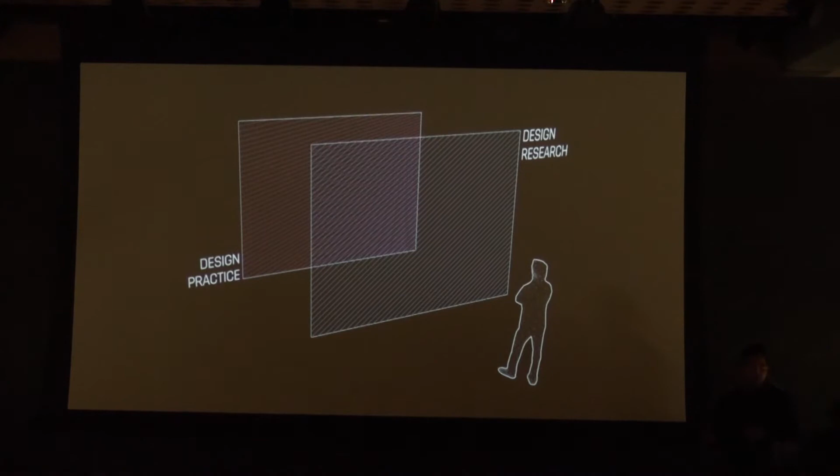This is something I'm interested in a literal sense, but more specifically in a figurative sense. What I'm interested in is the overlay between design research and design practice. Design research is where we begin exploring technology as a technique, and design practice is where we begin exploring technology as a tool. What makes these things multiply and become exponential is the project lens, how you view this relationship and how technology now informs a new design intuition.

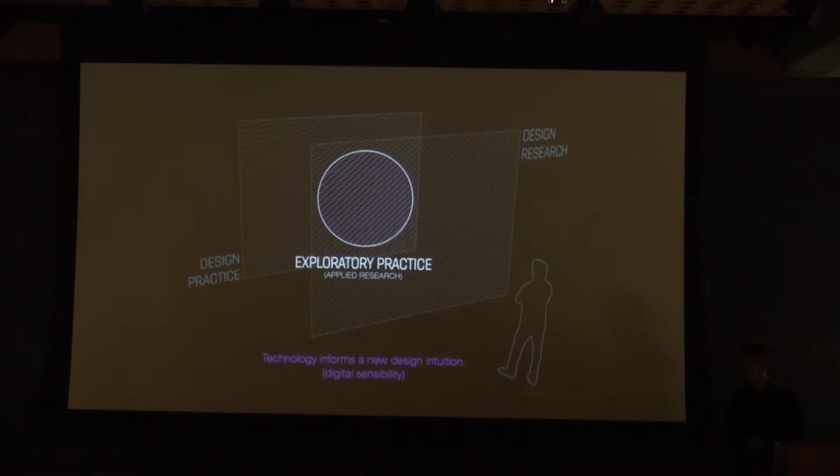What I'm not interested in is thinking of design as a science, nor as a pure humanity. I'm very interested in this sensibility and intuition of thinking of design as an intuitive process, informed by developing a greater agility with these tools, and thinking about the computational tool the same way previous generations have thought of the pen or the physical model, as tools that help you think.

The work we're doing in the office crosses a number of different scales, from very, very large to very, very small. All of these projects range from academic to self-initiated competitions. We've won some, some have been commissioned, some have been realized. All of them are what I would call applied research projects.

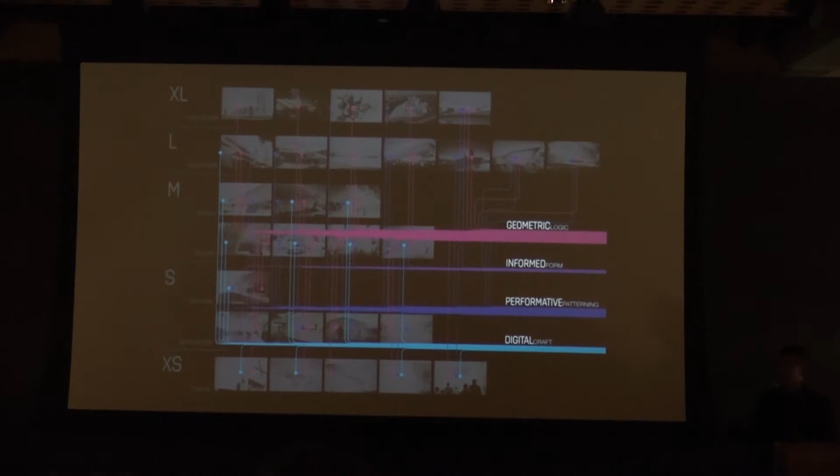Those applied research topics are identified as geometric logic, informed form, performative patterning, and digital craft. I'll get into more detail of each of these topics as the talk moves on.

Digital craft is something I'm really interested in, less so as a seamless process where we move from digital to physical, but more as a redefinition of the term craft. Historically craft has been aligned with the relationship between artifact and maker, and this affinity between the two. I think now that process extends towards a digital realm.

The way we think about making something, there's a lot of feedback in terms of what the process gives the crafter or craftsman. I think now there's that same feedback where those working with digital models understand that there's actually a craft to modeling, a craft to producing a tool path, and a craft to understanding how to post-produce a 3D model or something off the CNC when it comes out.

We started exploring these ideas on many different projects, but the one that really jump-started all of this was a pavilion done in London, with my colleague Alan Dempsey while we were both working at Future Systems. This was a competition we won while working full-time, working on it during lunch breaks and in the evenings.

It was a competition for the AA in London to produce a freestanding pavilion for the 10-year anniversary of the Design Research Lab, which we were alumni from. It was sponsored by a material manufacturer called fibreC, which produces fiber-reinforced concrete.

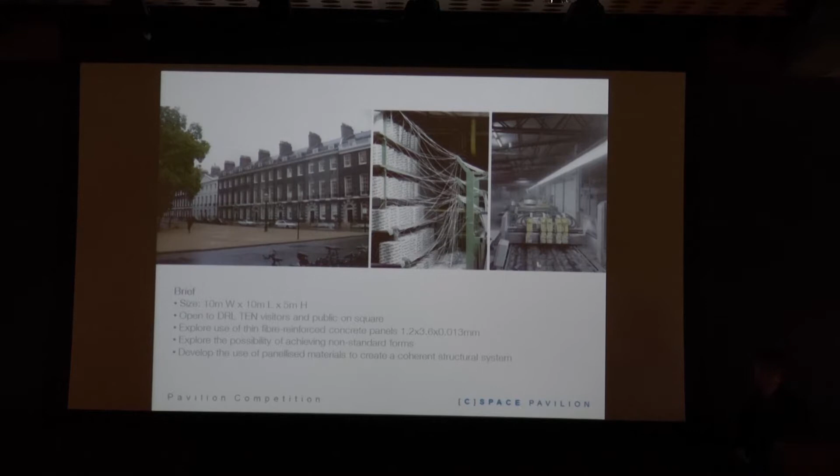This is how it's manufactured: basically thin strands of fiber-reinforced, or fiberglass, fed in as a matrix inside thin sheets of what's essentially plywood concrete, like thin sheets of concrete that are equivalent to plywood.

We produced a quick sketch looking at a continuous form, which moved from all the different programmatic elements the pavilion wanted to enclose into one continuous form, and then looked at breaking it up into a series of CNC milled profiles. Each of those profiles is limited by the size of the actual sheet.

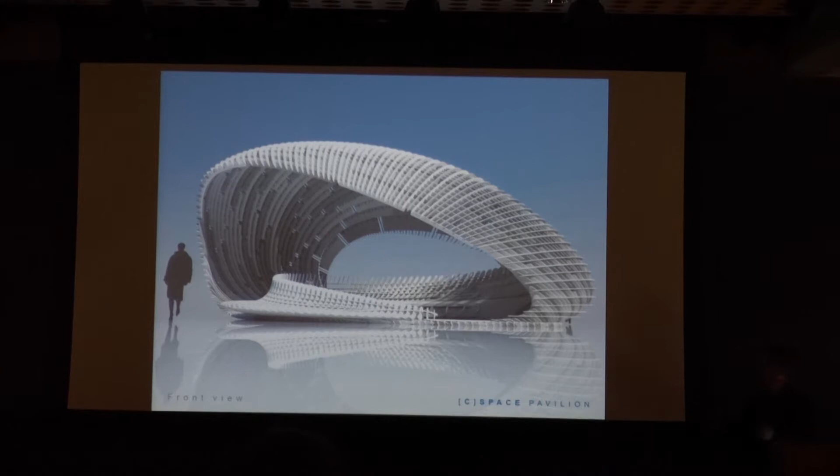It interlocked into a discontinuous shell structure, which at the time of the competition we proposed would be held together by friction. Everything would bend into position and lock into place. We looked at having a minimum number of four connections that would allow them to lock in place together.

We produced a physical model, or a digital model, which after we won the competition went through a huge number of iterations, working very closely with our structural engineers, AKT.

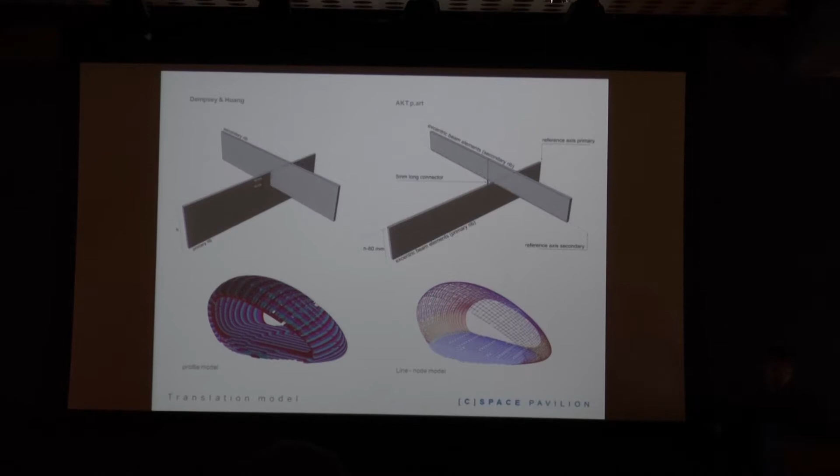What we were producing was these interlocking node models. What they actually wanted was this, just points and nodes, or nodes and lines. They were using that to do a standalone C# plugin, which would analyze our line node model.

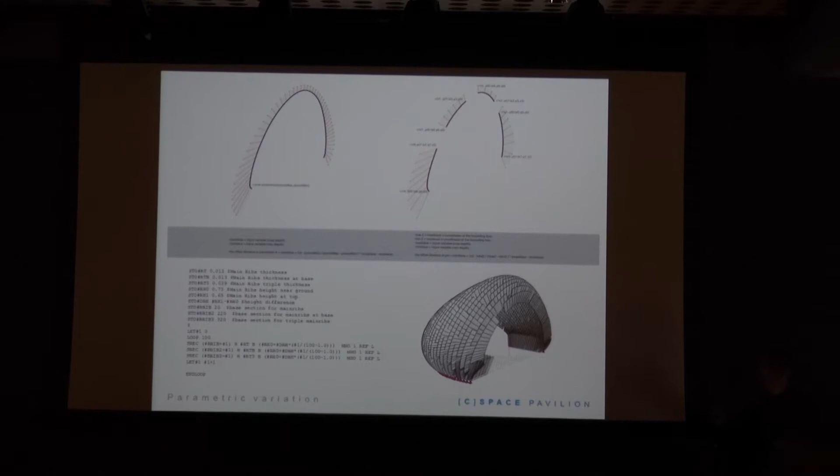It would size all of the members based off of the forces through that combined network of geometry. And you can see our model was actually getting really thick and really deep. Those profiles we thought we drew as thin and elegant started getting really fat, to the point that it was unacceptable.

So we began working through refinements and iterations of tapering, skewing, twisting, warping, trying to manipulate the geometry to get to a workable dimension. In the end, we got the dimension down to something we were happy with. However, we had to implement a dirty little secret: 3 continuous steel beams.

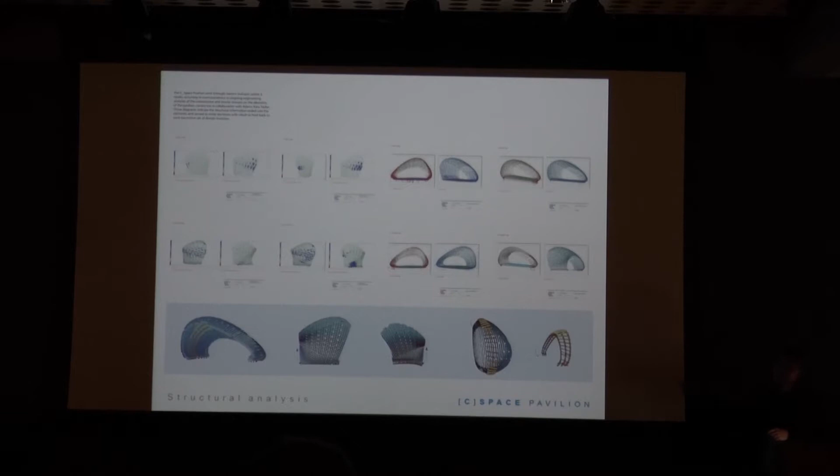Basically, the issue was not dead load, it was live load. As we developed the project and got everything to a workable depth, because of the geometry, it's essentially a solid shell when the wind hits it. And when the wind hits it from the side, it's racking a lot.

So we went through a number of different options for bracing it. In the end, the most invisible one was to put in these 3 continuous steel arches, paint them gray, and pretend they were concrete, and not tell anyone.

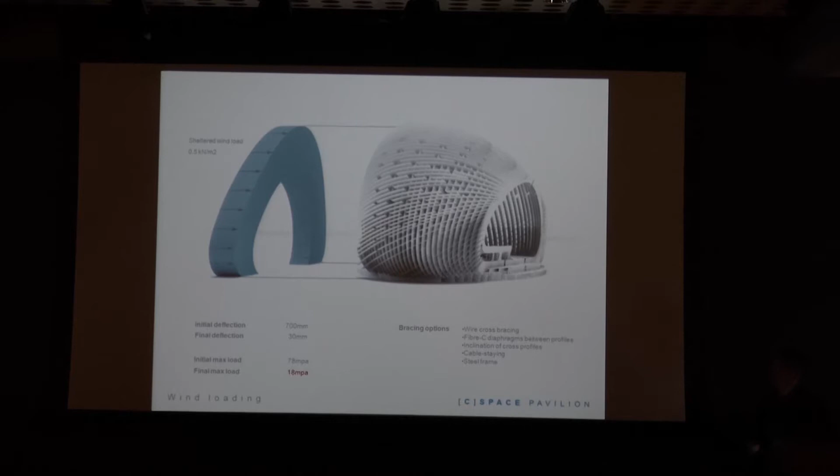We also went through the process of trying to develop construction drawings, which we realized traditional plan, section, elevation was not going to illustrate how to put this thing together. So we looked at IKEA flat pack assembly drawings as inspiration, and put together an 80-page construction set of assembly instructions.

Had all of this reverse packed, ordered, cut, delivered to site, ready so that when we unloaded everything, pieces would be packed and unloaded in the correct sequence of assembly. We had a script written by our good friend Marc Fornes of The Very Many, which intersected all of the profiles in 3D space, sized them based off of the angle of intersection, named them, unrolled them into 2D space, nested them onto sheets, CNC by water jet, delivered to site.

When we got to site, we realized, I don't know how Syracuse operates, but I do know that the AA is run by architects, which means administratively it's not the most organized place. In this case, we arrived with 800 unique concrete profiles precisely organized into a reverse sequence of construction, to realize that we did not have a parking permit.

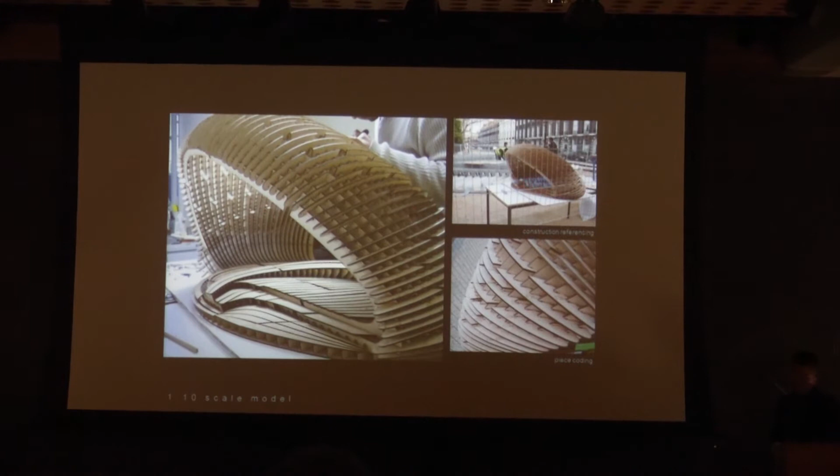The entire thing was constructed, had a 3-month permit to be on site. It was very, very popular, and we extended it for another 3 months, then another 3 months, another 3 months, up to 1 year, before we couldn't extend anymore.

Ended up selling it in an art auction to an art collector in Singapore. Never heard back from him, so I don't know what he did with it.

But what you see here is the opening night, or 2 a.m. opening morning. You can see the construction fence still up. What you don't see is the two steel props, or two wood props here holding up the structure, and myself and my colleague Alan Dempsey and Hanif Kara, our structural engineer, arguing.

Hanif argued that this structure was not the same structure he had engineered. Because we had an unlevel site, and because we had thrown all the things into random piles, and because we were working off digital files with almost zero tolerance, we had to fudge a little to get things to fit. There were a couple places we had kicked things in and broke a few pieces to make them fit. Hanif said it was not the structure he had engineered, and he was not going to risk his engineer's license on that. We argued that we had 12 students climbing this thing like monkeys for 2 weeks. We think it's going to stand. He thought our 'think it's going to stand' was not worth his engineering license.

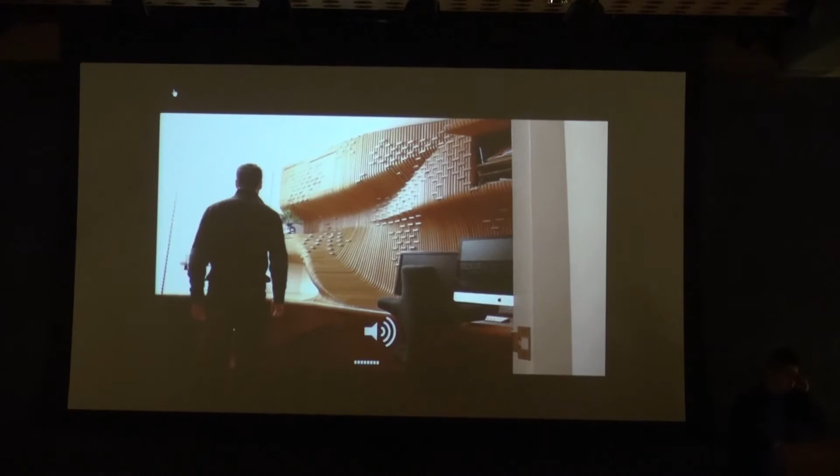So this kind of technique also stemmed another project, done in London, again looking at how you can create three-dimensional form from two-dimensional processes. It was a home office for a private finance guy. I don't exactly know what he does, I just know he has a lot more money than I did. He saw something else I did for another office and asked me to do this installation.

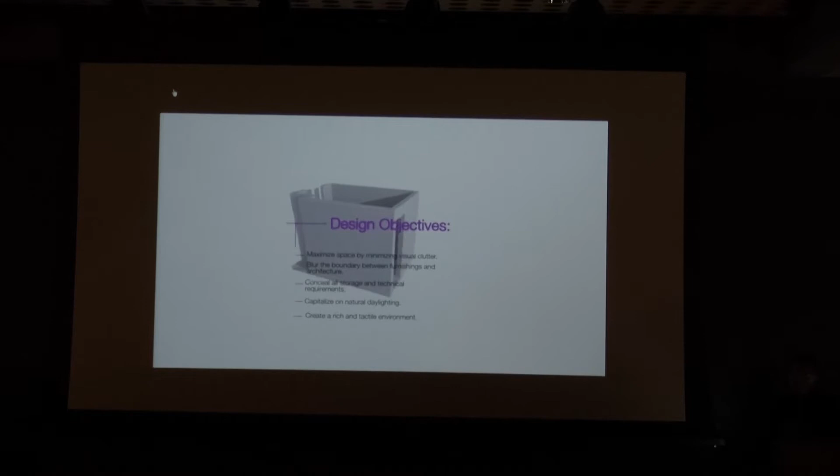He wanted a very sculptural desk in his office, and he wanted to do something that would hide and minimize the clutter of objects in his space. So we designed this three-dimensional form and looked at producing it in fiberglass and making molds. To do it in fiberglass, you're actually making it 3 times - the male mold, the female mold, and then the piece itself.

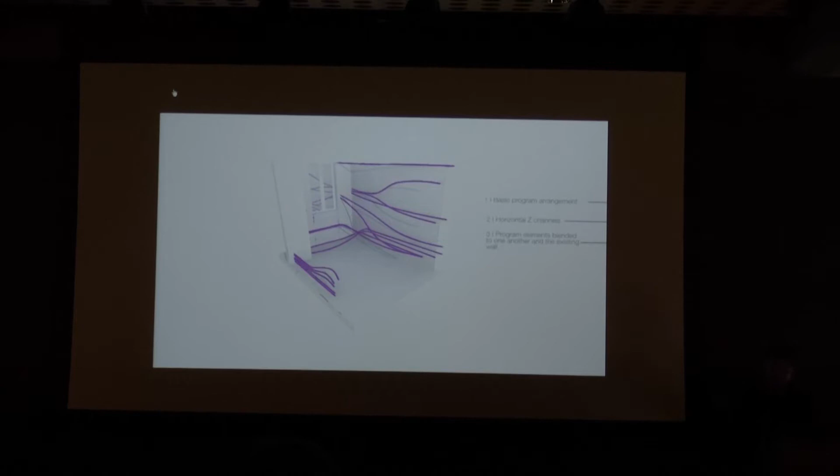So what we started doing was looking at, okay, if we do it as two-dimensional cuts, putting together this flat pack assembly of pieces and hanging everything on this dry fit assembly, which hangs on Z channels, which hang on the walls. Everything was done off-site. The entire assembly on-site actually took 4 hours. So we basically did everything in the shop, assembled into prefabricated components. We've got roughly 75% material efficiency here, and delivered to site.

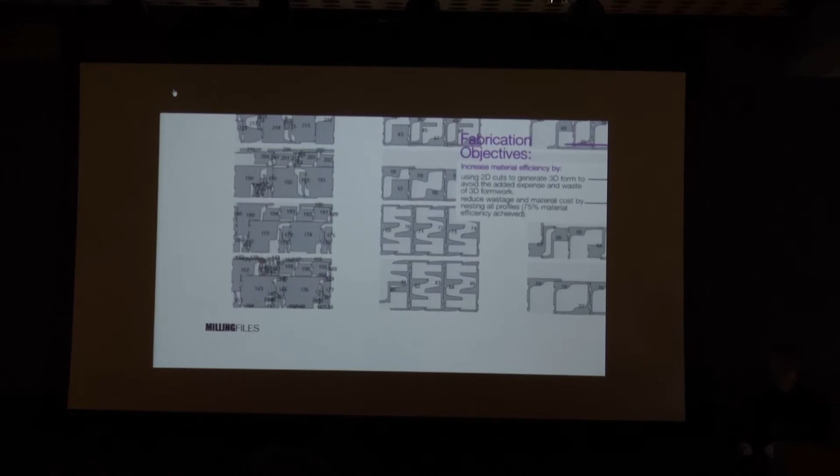Then what you see is inside here we have all of the hidden compartments where his filing and shelving go. There's a few places where there's spaces between the profiles, so you can slide filing in that way, as well as feed the paper shredder.

Here's the completed thing, and you can see the details of how the spaced out areas bleed into parts where it becomes a continuous surface for a work area. The guy's a big world traveler, and so everything's only fixed at the back where it fits on the Z clips that are holding everything in place.

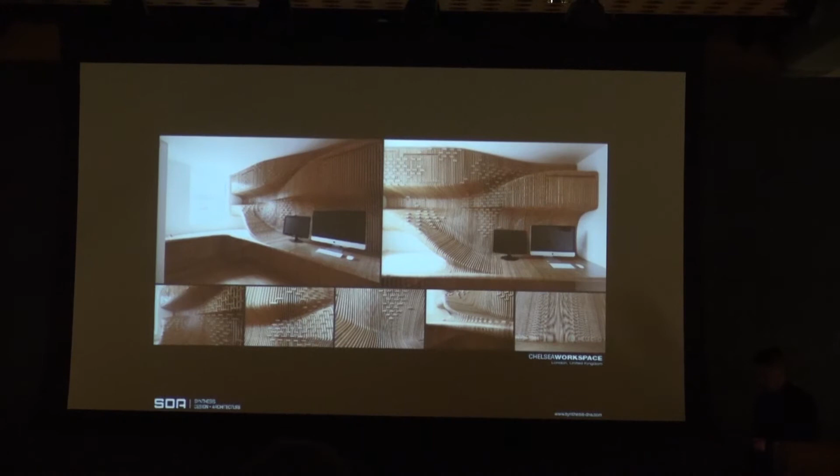So what we did in the front is we put these horizontal bracers in the pattern of a world map. So he wanted to be able to have this world map, but not have to look at it all the time. So it's a world map when he thinks about it, and it's not when he doesn't. And this is more of the assembly drawings.

That process informed us on another project where we started thinking, well, if we could get 75% efficiency with a geometry which we came up with first, what if we just tried to design around getting 100% efficiency of material? So this table is one which was done for the Beijing Biennale 2 years ago. Unfortunately, we pulled it from the Biennale. We were working with a fabricator in China, and they produced the table, and I won't show you pictures of what they produced because it was really, really bad.

But the idea behind the table was that we have this parametric model. Everything is adjustable, so we have the spread of the legs, the height of the table, the torque of the angle. All of those things are nesting inside one another, and depending on how many sheets you specify, it defines how many levels there are, how many overlaps there are. We wanted to say that you have this model that can be given to somebody who wants to design their own table, adjust the spread of the legs, adjust the height and amplitude, adjust how many sheets. The more sheets you have, the less material efficiency you have.

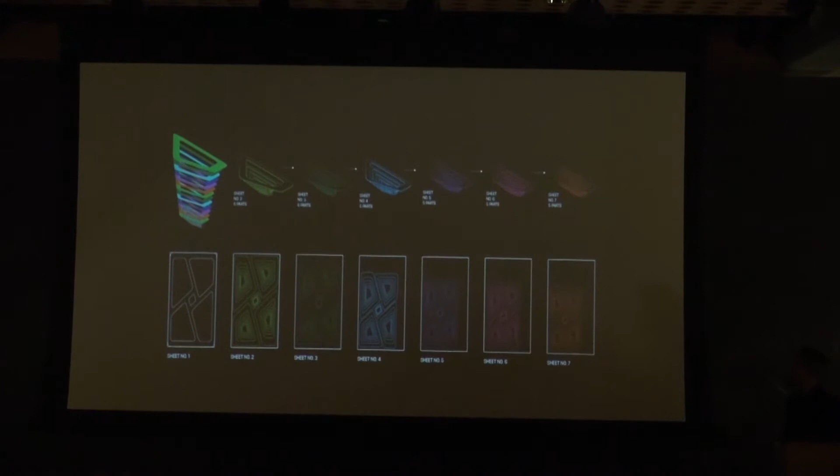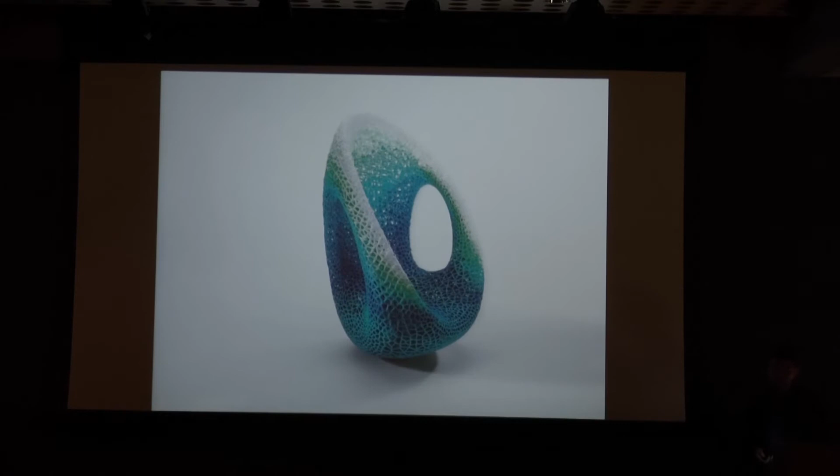In the end, it was not 100% efficient, but we were able to kind of work around this idea of thinking about the way you were going to make it informing the way we designed it. And here you get some views into the belly of the desk or table, and see how the legs spread. This is another project we just completed very recently, and it's a very different process, but similar in the sense of trying to think about how you're going to make something as the way that you spark the discussion on how you design it.

We got approached by Stratasys to produce a three-dimensional design object for their 3D printers. That was about as much as they said to us: just give us something beautiful that we can 3D print. So we went over to Tel Aviv, Israel, and saw their machine. They have this amazing, amazing, amazing machine.

It is unlike a traditional 3D printer, which has one head, one nozzle, and prints in layers of say 0.1 millimeters. They have a machine with two heads, each with 96 nozzles, which prints in layers of 16 microns and can print two different materials — in our case, opaque cyan rigid, and white transparent soft. Because you can do that, you can create matrices of gradients between those two conditions.

One of my pet peeves as somebody who teaches is that I think students use 3D printers way too liberally. I see people doing 3D prints of things that really don't deserve to be 3D printed. So we wanted to do something that could only be 3D printed.

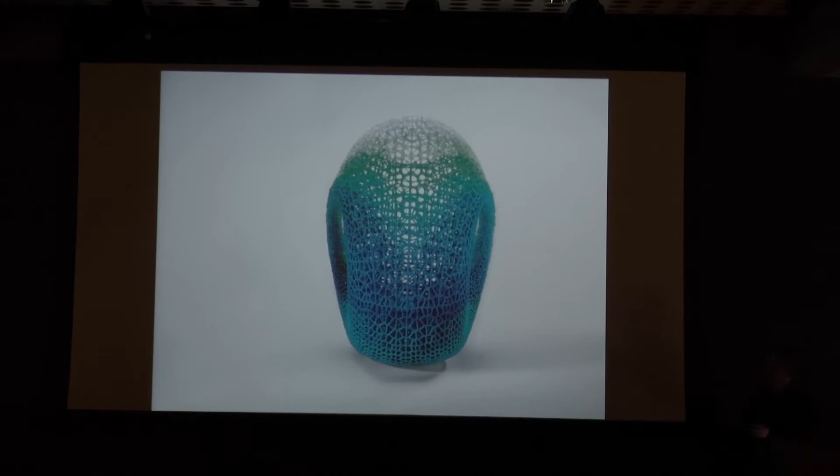This chair is a very densely packed mesh using a process called circle packing, or sphere packing. We basically derive a shell, pack it with a series of physically informed marbles. Those marbles are variably scaled based off giving them physical properties and masses, and aggregate the way you'd think of if you put rocks inside this volume. They define a volume, and where the heavier marbles fall to the bottom it gets denser, and where the lighter ones go towards the top it gets more open, creating a gradient condition that also starts to relate towards ergonomics.

So the white areas get soft, the blue areas get rigid, and the rocking chair can have two different positions, also as a lounger. In the detail here, you can kind of see how that gradient condition scales out towards that perimeter.

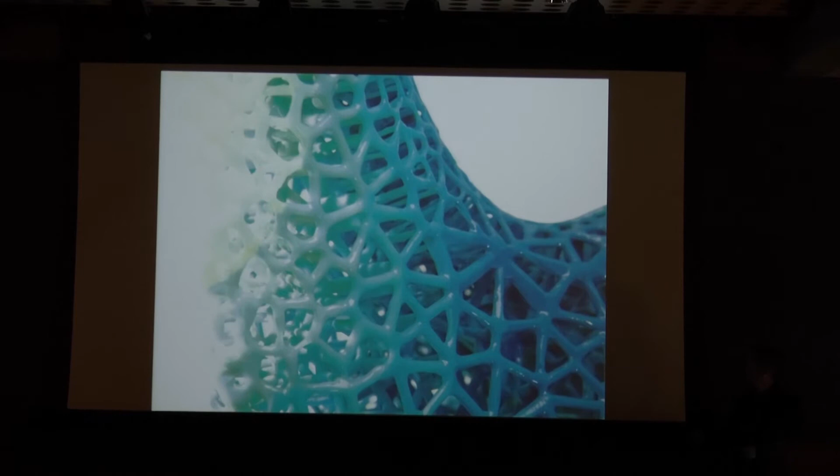The chair is produced in a series of gradient steps, so you basically have to give them ten files of different gradients, and then they can produce those files. They're now working on one where you can actually color code each mesh vertex, and then you can get a far finer gradient. In our case, we had to do it as these ten steps.

The other topic we're really interested in identifying is performative patterning. In this case, the reference is a painting by Bridget Riley, an op artist from the 60s, a British op artist who did these kind of two-dimensional paintings which are very three-dimensional and very dynamic. They're always static and always two-dimensional, but they always appear to be moving and always appear to be three-dimensional.

I think that's the way we like to think about the term performative patterns — not exclusively as something that is performative in the engineering sense of being structurally sound or being responsive or doing something with the environment, but actually something that encourages or engages people to visually and physically interact, that somebody actually wants to walk around and engage.

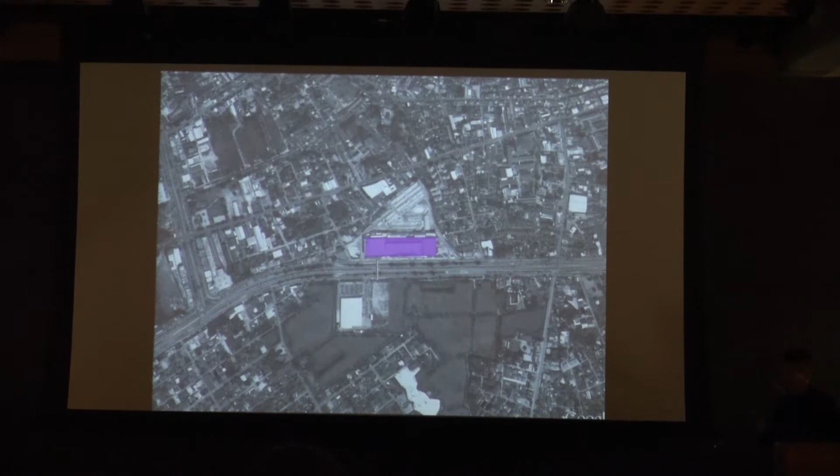So this is a project we did in Lampang, Thailand. It is only the facade for a shopping center. The shopping center is on the side of a freeway. So the box we did not design, we only designed the skin.

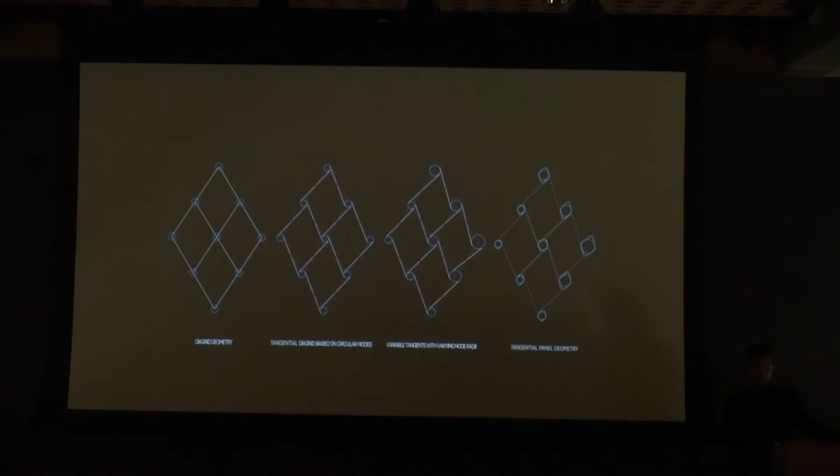What we looked at was having this kind of forced Moire pattern where you have a diagrid that reacts and creates hot spots and different densities of opacity. The way it works is we have a point grid, diagrid, and then a series of radiuses. Those radiuses expand and contract based on attractor points and attractor curves, and they morph to change the density. There's kind of two grids, a pink versus a white, and then they react. At times the white is predominant, at times they're equal, and other times the pink is predominant.

So what you get is this morphing dynamic condition where we actually wanted this grid to morph to say that the signage was not something applied to the grid, but actually exposed by the grid. That's a battle we lost. The client still maintained that the signage had to go on top. But we were able to continue this idea of keeping this gradient condition in the project.

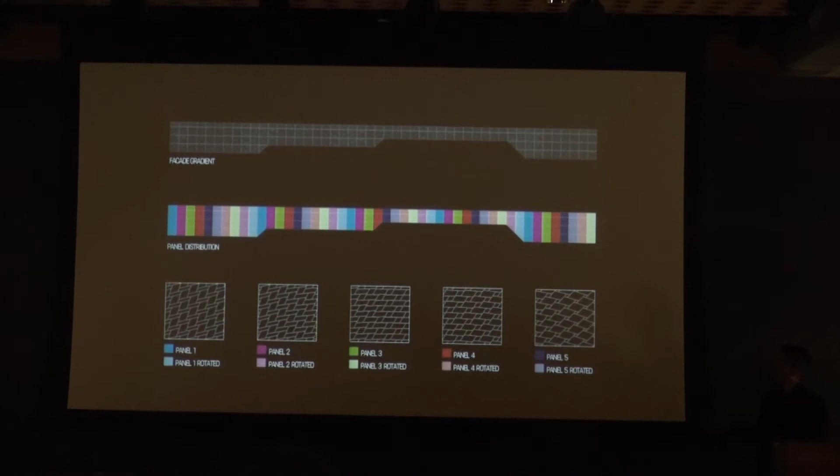What started off as entirely free form was thousands of pieces, each unique. We had to look at ways to mass customize. So in this case, we were able to turn it into exactly 5 prefabricated panels. Each of those panels you see mapped out here. By rotating those same 5 panels, we were able to assemble them into different gradient conditions. What was at first a free-form pattern starts to become a completely linear pattern of gradient. And you can see those 5 patterns here mapped out to the site.

Everything is actually entirely handmade. This is Thailand, so it's far cheaper to pay lots of people little money to bend things very accurately than it is to CNC bend. So what we produced was a series of jigs, and people literally just bent the same number of pieces of aluminum profiles over those jigs, all attached to a steel structure. You can see here how you get those gradient pulses from red to white. And at night, it is all backlit with phase-changing LEDs and produces this gradient condition.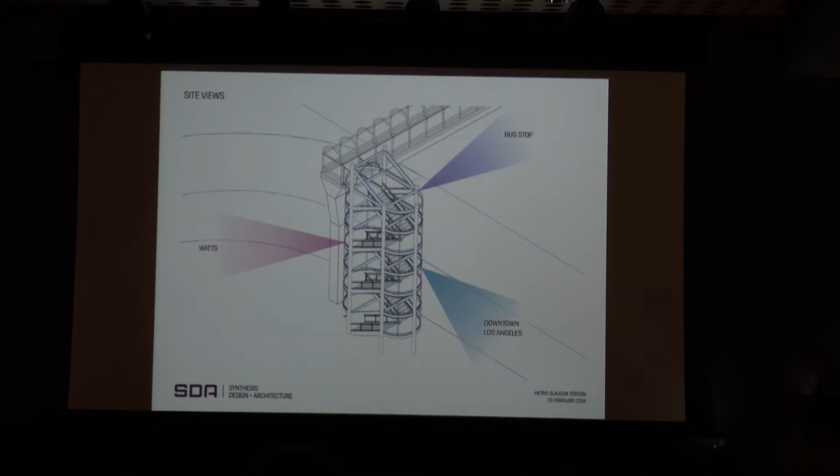This same idea is informing this public art installation we're doing here, in Los Angeles — it's in South Central Los Angeles at the Slauson station for the metro.

It is basically, we were asked to do, well, it was a competition which we won, to decorate this stair, to do something with that stair. Our idea was basically that there is a series of views, one towards downtown Los Angeles, one towards the Watts Towers, one towards the actual bus stop, and to think of all of those 3 views as kind of hot spots. Then what we produced was this installation here, which we're currently in the process of producing the construction documents for.

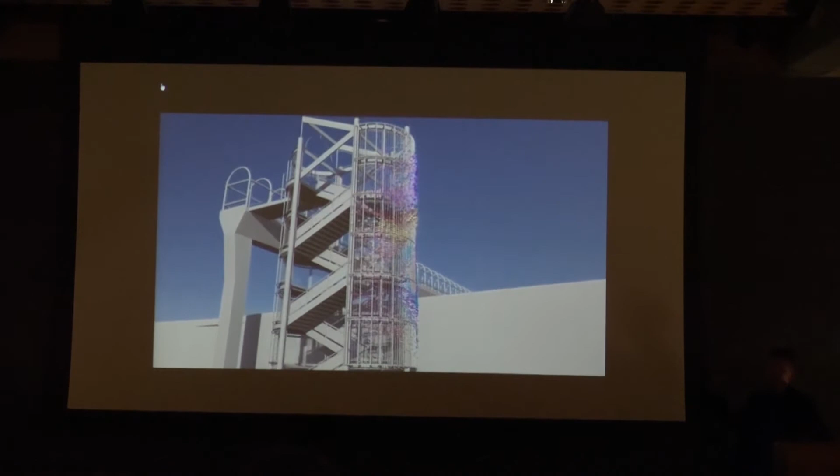It's a sort of field condition — I didn't realize at the time, and kind of thought of this as I was giving the presentation. When we came up with the design, it's entirely self-absorbed, self-referential. We liked these ideas of producing variable conditions and varying views, something visually provocative that you move around and changes, all driven by these folded petals.

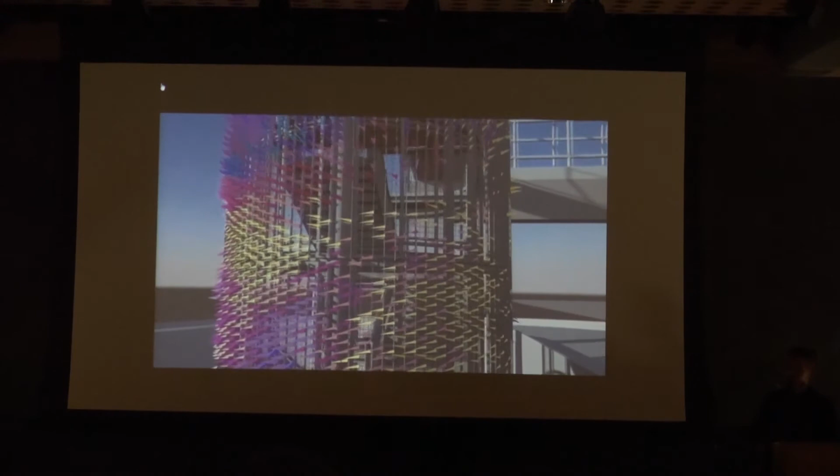As I was giving the presentation, these public art projects are kind of strange — you're not presenting towards clients, they bring in the community people. They basically had a black guy, a Chinese guy, a Mexican guy, a gay woman, a lesbian woman, a gay man. It was like a Benetton commercial. As I was giving the talk, I was like, and this project is about community and about lots of different pieces of different colors and different orientations coming together to create one cohesive thing. And they loved it.

So I walked out of that going, wow, I pulled that out of my ass. But in the end, it actually worked really, really well. And we got this commission.

We're now producing it. But the other thing with public art is that you are not actually being commissioned to design something, you are selling them something. So you get a set fee, and they give you a set budget. And if I sell you something that costs me $2,000 to do, and you have a contract for $100,000, I just made a lot of money. But if I do something that costs more than $100,000, then I just lost some money.

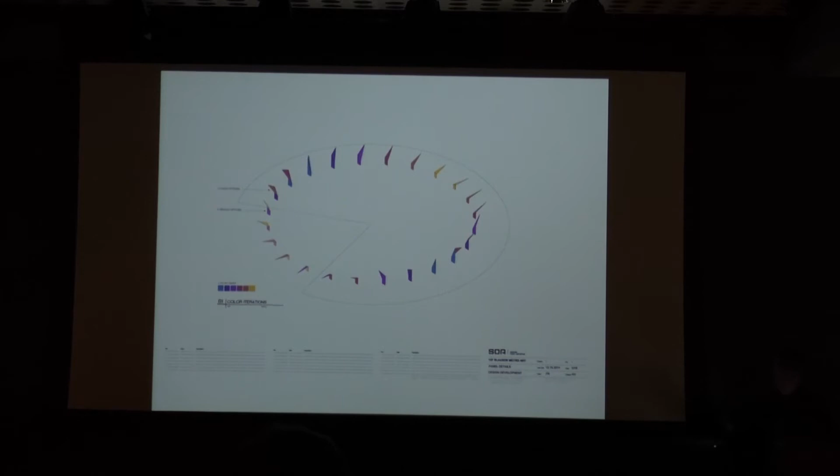So we had this process where we really had to be very, very conscious of cost. And so we began looking at how we can produce these things from very limited means. And so what we came up with was this color wheel of different rotations. You have exactly 6 colors and exactly 6 different pieces. So those 6 pieces, when rotated into different conditions, are not the exact same cut, but very similar cut, all hand cut.

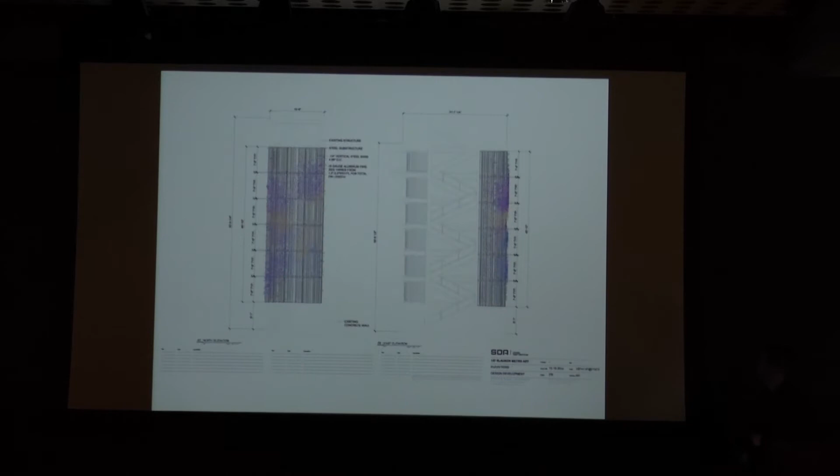We basically said, let's make the geometry do as little as possible and make the pattern do everything, and the coloration do everything. Everything is hand assembled onto a set of prefabricated steel panels, and then hung to cover the stair. And then what we did is we sat there and used our parametric Grasshopper model.

We attached it to Microsoft Excel, and ran through different pricing options with our fabricators and said, okay, if we have 10 different colors, 12 different colors, 5 different colors, 3 different colors, 2 different colors, front and backside same color, backside, and all of these different options - we were getting pricing points on all of these, and also looking at what the visual effect is.

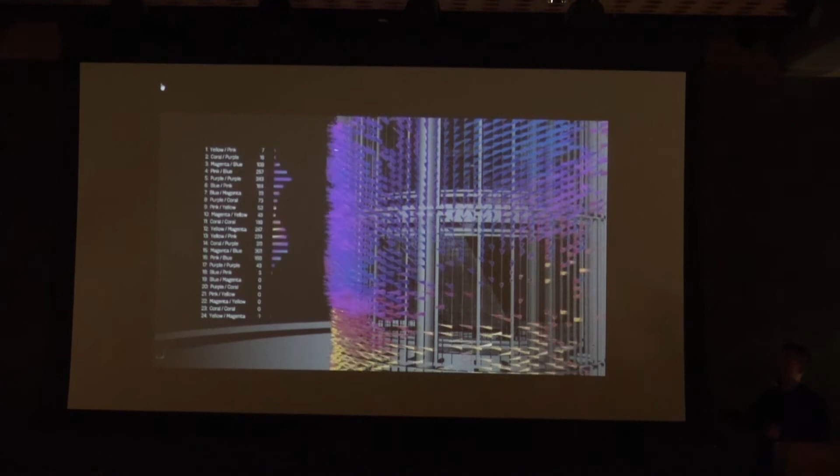Because there's actually a certain point where complexity plateaus. You get to a certain point and you're paying a lot more, but it actually doesn't look any more complex than the previous one.

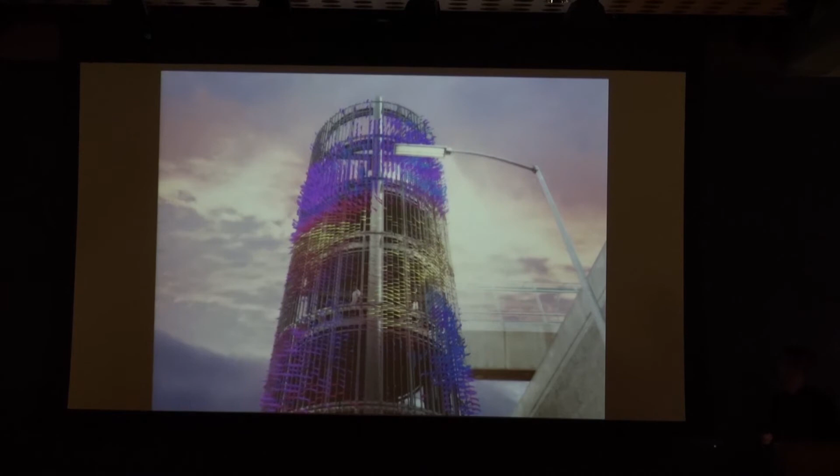So in the end, this is what we arrived at. The colors are meant to reference the LA sunsets. I've been told we have the best sunsets in the world. Apparently that's because of the pollution. But we do have some beautiful sunsets.

The other issue that I like to talk about a lot is geometric logic, and I like to think of this as something that deals with a very core issue about delivery for the way my office works, because we have a lot of work in Asia, and in Asia we're only allowed to deliver up to design development. And when you deliver up to design development, that means somebody else is producing construction drawings, which means somebody else is absolutely going to change things.

And so what we like to do is dimension things by relationship rather than by dimension. So our drawings oftentimes, instead of saying 35, 35, 35, we'll say equal, equal, equal. So if they change something, it just stays equal, equal, equal. That's what they need to know. Or align, align, tangent, tangent, things like that. So I like to think of the way that I work in Grasshopper very much as the way that I describe the work to the people who build it, because I care less about the dimensions and more about the actual relationships.

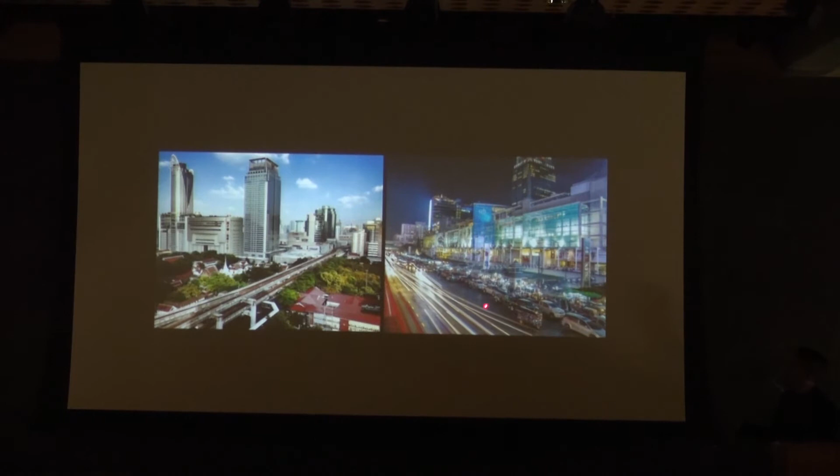But it's this really intense condition, and we wanted to capture that. And this is the site, this is the shopping center, this is the client's headquarters. There's these 2 axes that come through the site, and a third one coming out of the shopping center, creating these 2 nodes.

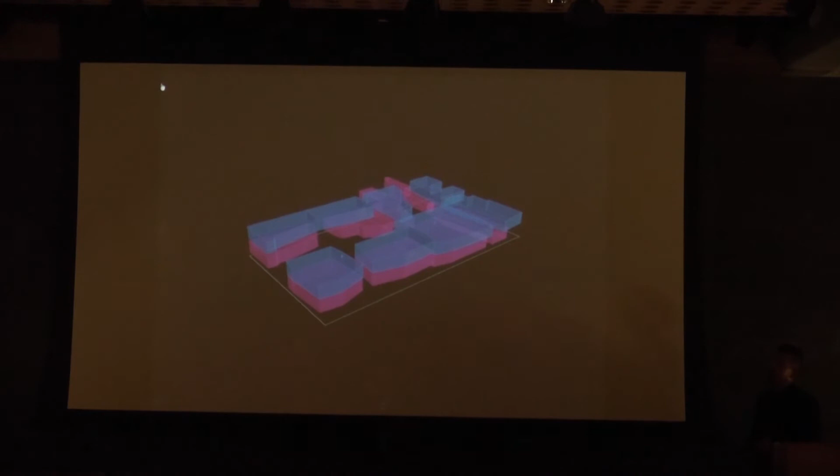So one of the things we wanted to do was not think of the 2 atriums as nodes, but actually think of them as shifts of the absence of mass from a series of shifting volumes. And this parametric model allowed us to sit down with the client and work with them, connecting this to Excel and calculating leasable area versus their area efficiency in terms of what they were getting back on their return versus our own design whims, finding this right balance between this torqued geometry and their return on investment.

Once we settled on that, we began thinking of this mass and thinking about the skin as something we really wanted to pick up on the intensities of that urban condition we were just looking at, and thinking of the interior as an oasis. We wanted to think of these intensities as carving away and creating moments of internal calm. The intense areas we mapped as perforated aluminum, something hard, glossy and shiny.

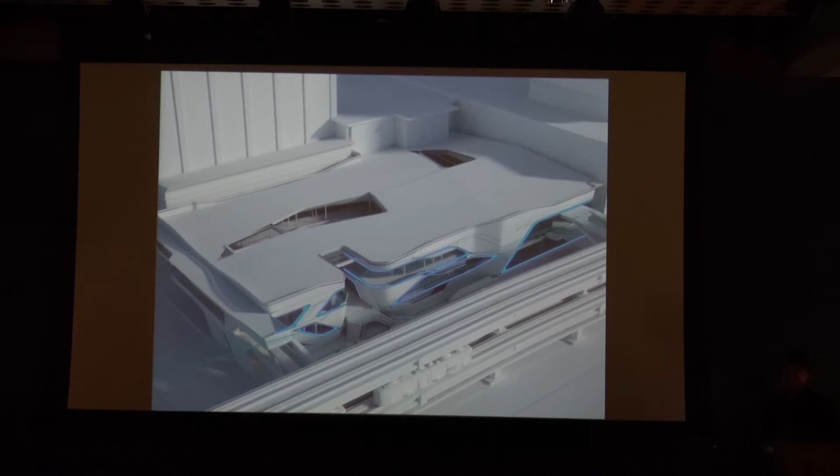The internal calm areas as CNC milled timber, all wood, soft and much warmer. It creates these fleshy areas where the wood meets the aluminum. We have these perforated panels which pick up the intensity of the street lights and lights on Ploenchit Road. This is the completed building.

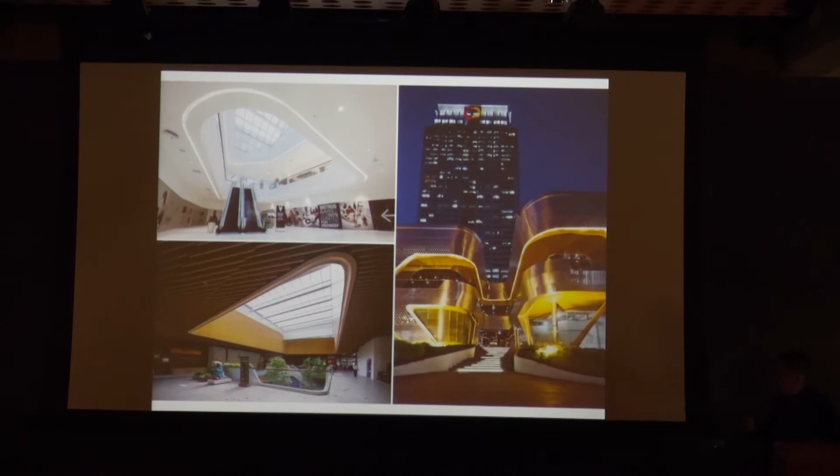So you can see here from Ploenchit Road how you access the building, move through the entries, the CNC milled interior atriums. This one is actually an open air atrium, this one is enclosed. The perforated panels here, and then the tissue of that timber where it meets the perforated panel.

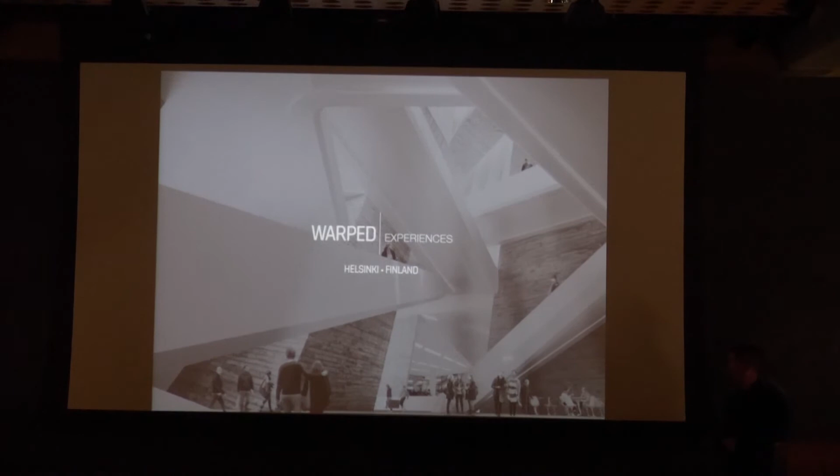Another project which we can't say completed was the Guggenheim Helsinki competition. I don't know if anybody here did it, but we were one of 1,752 entries. I don't know if anybody saw the Office US study on this, but they did a calculation where if there were 1,752 entries, each done by an office with one principal, two assistants, one intern for one month, then Guggenheim Helsinki got 15 million euros of free labor. So I'm a small portion of that free labor.

These are our panels for this competition. It took a little longer than the one month they specified, so we actually contributed more than the 15 million euros - we did it in about two months.

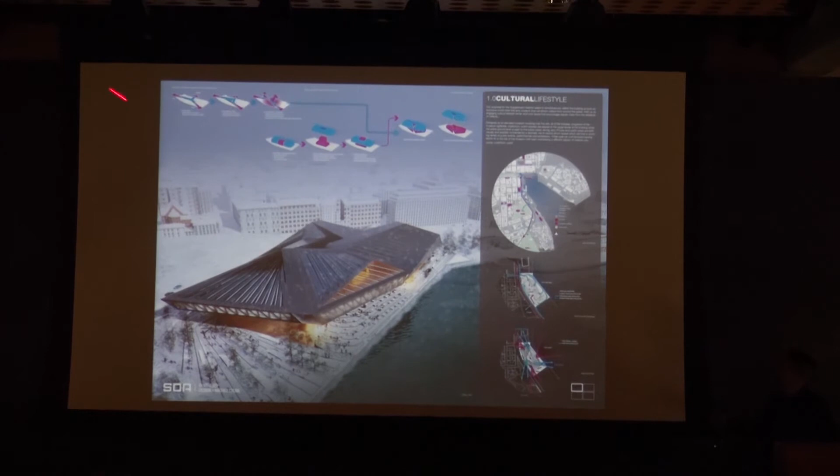We're looking at the museum as a kind of lifted social space. The museum lifts off the ground, and all of it is cantilevered, elevating over the site. We have entirely public ground floor, and that public engages the museum up through the central atrium with three views that leak out, but also three access points which leak in and torque around this central atrium. That torquing creates the structural and circulation condition where everything torques around three cores which support the project, and three circulation paths which torque around and create those views out.

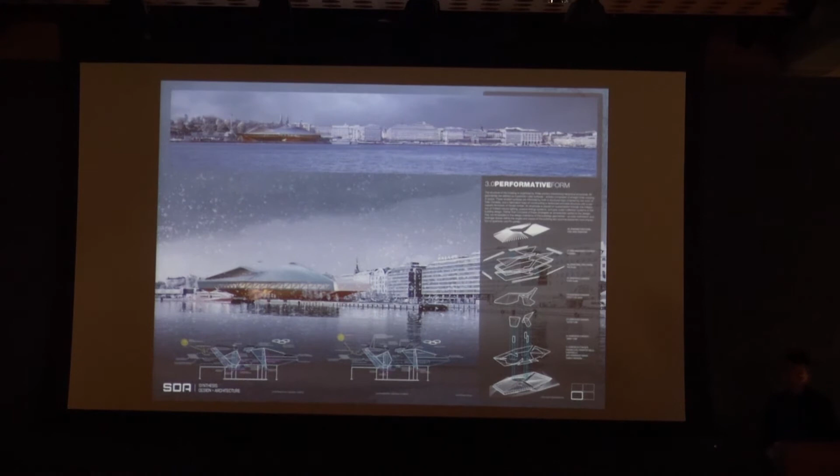Then we have this big cantilevered truss tied back through tension cables to those structural cores. We did a lot of intense environmental and structural analysis, all done with our colleagues at Arup. Needless to say, we didn't win.

The exterior skin has two main features. Part of the brief was that they wanted to reference Finnish culture and use Finnish wood. So one of the things we did with the wood is look at these hyperbolic torqued surfaces, thinking about using wood as permanent formwork. You would build these permanent formwork structures, pour the concrete in, then remove the scaffolding and leave the skin of the formwork as the cladding for the concrete.

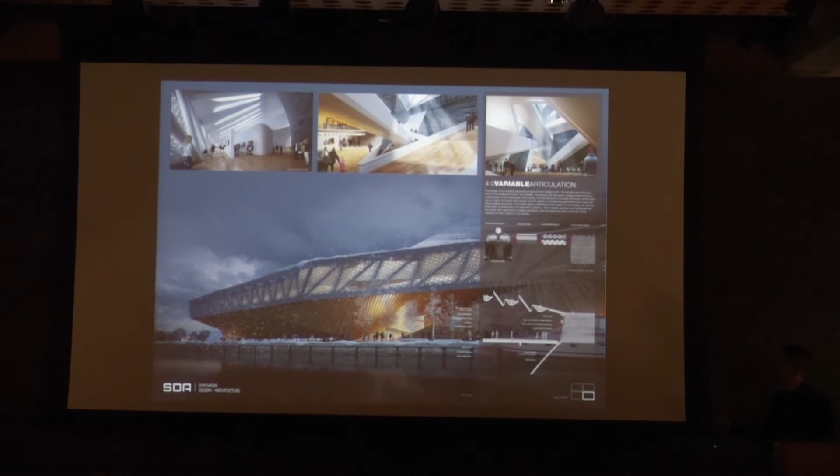For the skin, we looked at a traditional Finnish sweater and the variable articulation you see in it. Instead of articulating the different components of the body like the sweater does, we looked at articulating the structural condition and different visual conditions of where we wanted porosity and where we didn't.

Another project here looks at a very different reference. This is referencing Claude Parent and Paul Virilio in their treatise, The Architecture of the Oblique, which thinks about an architecture that could be continuously walkable, with no vertical surfaces, only oblique and horizontal surfaces, meaning your entire relationship to the architecture is through gravity. You're either walking up something, across something, or down something. We began looking at this as something where we could create this continuously walkable surface.

We were really interested in the idea of rheotomic surfaces, which came from a guy named Daniel Piker in London, who wrote a really excellent article on this, basically thinking about a kind of surface which peels out of the ground.

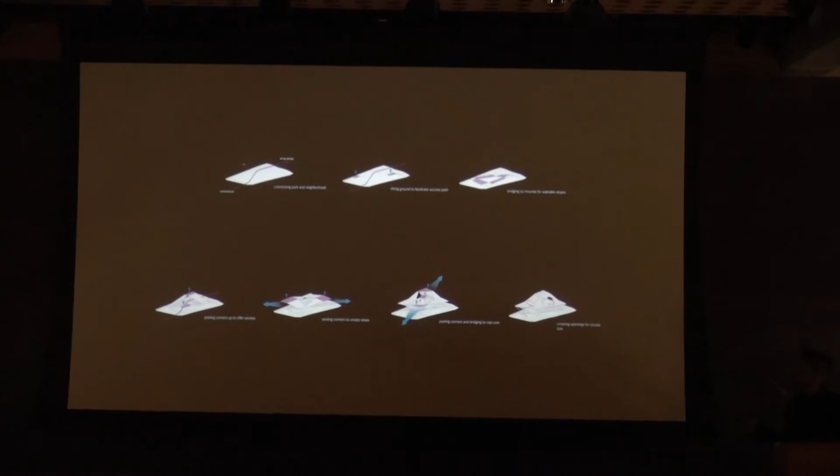The site connects a park with a residential area, and we create this diagonal condition connecting those two things, pull up two structural cores, and from those cores start cantilevering and knitting together these surfaces to create a continuously walkable condition where you have no designated floor, kind of like a parking structure. You just continuously walk through everything.

Basically what we were thinking is this is a library, and for a library it doesn't make sense, or what we were arguing for, to have designated floors. It was a Dewey Decimal System, which was just a continuous decimal system.

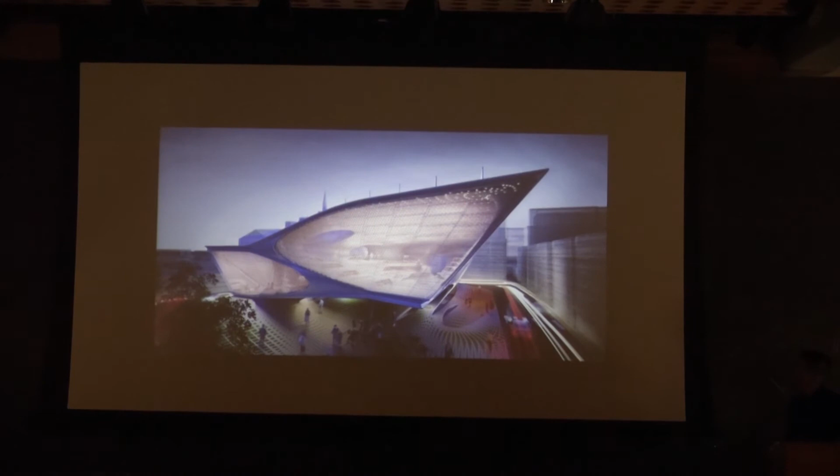It connects through the park, gets this kind of underground condition which moves through. You can see here where the park moves through, and we get these big, massive reading room spaces.

Because it was all about these manipulations of the ground, we wanted to think of the architecture as something where the furniture wasn't added to the architecture, but integrative to it. So we began looking at how we can integrate by the slope, whether the slope is a ramp, a stair, a bookshelf, seating, desks, etc., creating these ergonomic landscapes.

That process got us inspired to think about a process called dynamic mesh relaxation with a plugin called Kangaroo for Grasshopper, which simulates material properties.

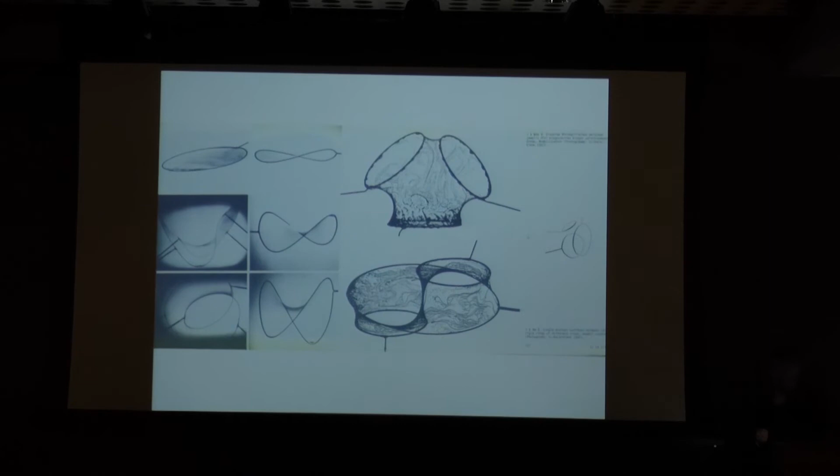This led us to begin thinking about the work of Frei Otto, who, if you don't know, just passed away a week ago and won the Pritzker Prize. He actually won the Pritzker Prize, or it was announced one day after his death. The good thing is he was aware of it before he died, and they moved the announcement forward to honor him in his passing.

He's an amazing design thinker and engineer. In this case, looking at minimal surfaces and thinking about them as the resultant surface of soap films that connect two wire boundary conditions. The minimal surface is mathematically defined as a surface with zero mean curvature that is able to connect those conditions.

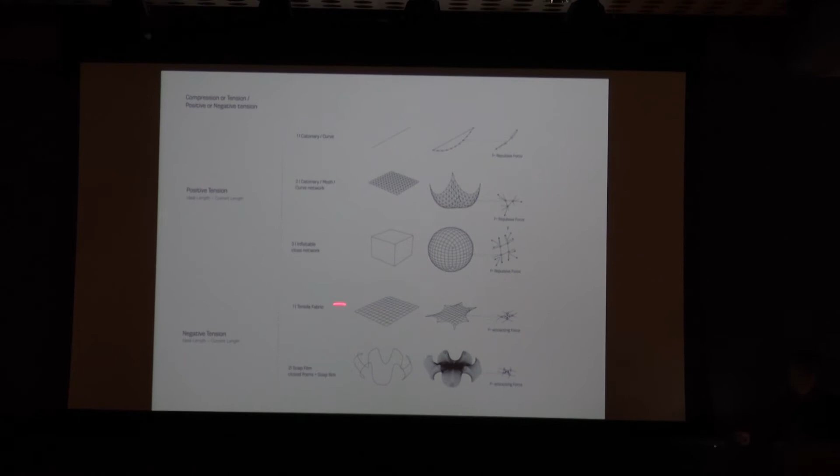So we began looking at how you can work with dynamic mesh relaxation in a digital realm, using this process to produce polygonal meshes and relax them to discover known minimal surfaces. There's actually a catalog—if you Google minimal surface, there's a catalog of known minimal surfaces that exists, and all of them can be created with algorithms and computational methods.

I'm not a programmer, nor am I a mathematician, and even though I'm Asian, not that good at math. So I'm far more interested in the intuitive process of trying to understand how to reconstruct these things. We were trying to say, okay, how do we develop an intuition about how to produce a minimal surface? So we challenged ourselves with exercises to reverse engineer and reconstruct known minimal surfaces and then analyze them to understand how they were performing.

But what everybody did was basically produce, how should I say it, a prefabricated garage. What we wanted to do was think of the pavilion not as a garage, which is a destination, but as an accessory, something you could bring with the car.

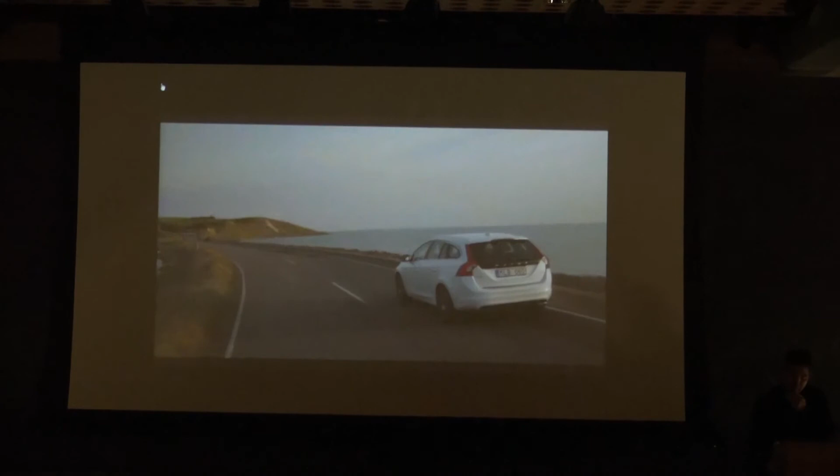In spring of 2013, Volvo Italia and Plan magazine launched the Switch to Pure Volvo Open Architecture Contest to showcase the new Volvo V60 plug-in diesel hybrid at undercover trade shows and open-air venues in Italy's public squares. Attracting over 150 entries from around the world, the winning entry was the Pure Tension Pavilion by Synthesis Design and Architecture. The entire pavilion assembles and demounts in less than 1 hour and fits in the trunk of the car.

The Switch to Pure Volvo competition, organized by Plan on behalf of Volvo, was interesting to us in terms of the kind of questions and challenges it raised. They required that the structure be easily assemblable, easily dismountable, and able to travel with the car, and be an iconic structure that could really showcase the car.

We saw this as the perfect opportunity to apply some of the research we've been doing into dynamic mesh relaxation, and thinking about how we can look at fabric structure in terms of something that's lightweight, portable, and easily collapsible.

The original idea was that the structure would wrap up and bundle into a little package, like a laundry hamper, and just pop open, which would have put us well out of budget. So we ended up moving towards a CNC bent aluminum frame, so it's slightly outside of the final shape it's going to take, but it gets tensioned into position by the skin.

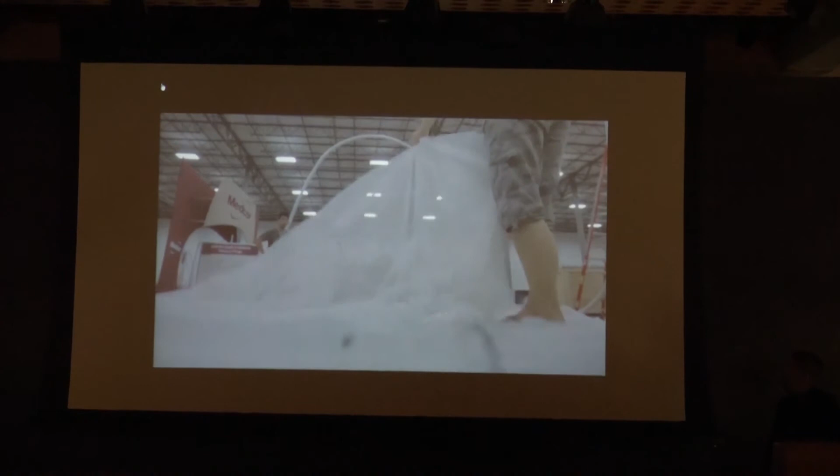On my spare time, I like to go backpacking and camping. So a lot of the stretch fabric aspects of it was something that was very attractive to me because it's something I was so familiar with, that lightness and efficiency, and also the elegance that the combination of simplicity and sophistication conveys.

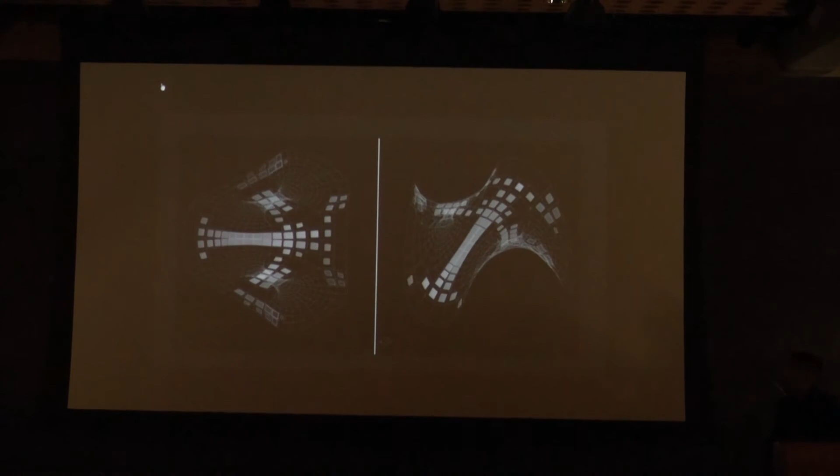We took that a step further and began thinking about it as a charging station for the car. We wanted it to actually be integrated into the whole structure, so that it's not just a plug-in interface with the power, but it actually produces its own power. So when we saw this design, obviously there were a lot of things that we saw fit together.

After winning the competition, we went through a process of rationalizing the geometry to make it more buildable. We worked very closely with our structural engineers, Buro Happold, based here in Los Angeles and Culver City, and then we started working with Fabric Images, who are based in Chicago. The design idea behind it is this idea of pure tension.

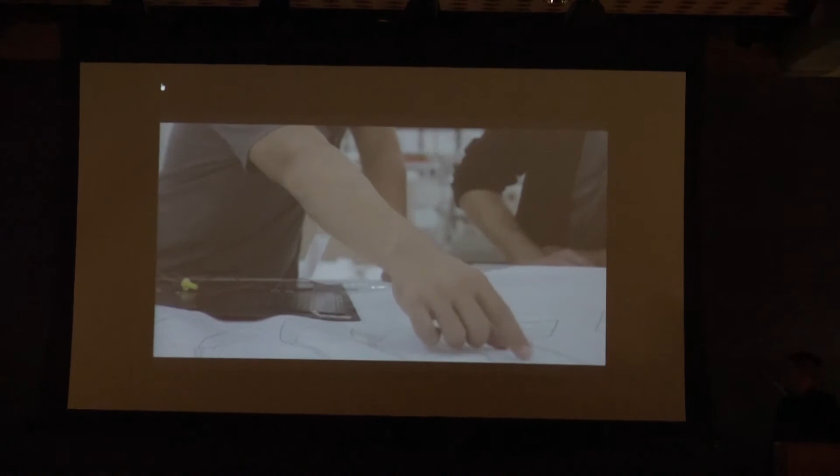We weren't sure how we were going to do it, but we started, and we started figuring out what worked and what didn't. Where we're at right now with the frame is that we have through bolt connections. The next step is to drill out and countersink all the connections for hex bolts, so it needs a flush connection, so there'll be nothing protruding. Eventually, between the seamstresses, our CAD guys, and myself, we figured out how to do it.

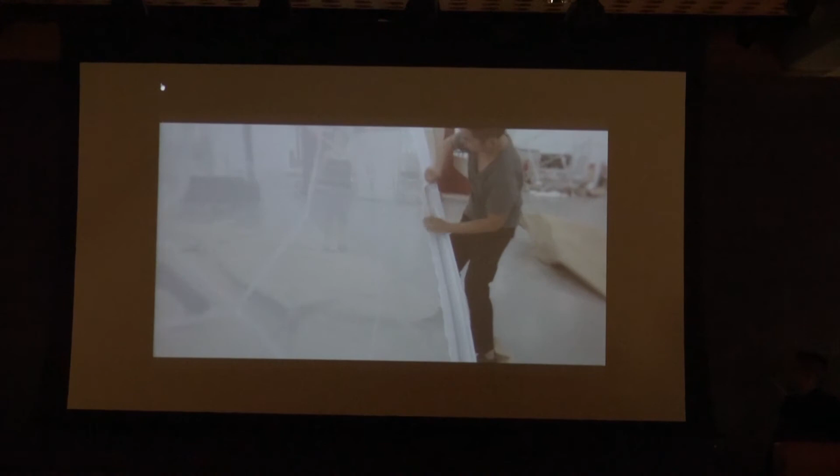Ascent Solar provides us with these flexible photovoltaic panels. Unlike normal photovoltaic panels, which are extremely rigid and heavy, these are extremely light and flexible. Because of that constraint, we had to choose a lightweight, 70% open mesh. And what's interesting about mesh relaxation techniques is they use the natural qualities of the material to create a shape.

What's interesting about this structure is it takes the natural qualities of the Volvo and lets that inform the formal qualities of the structure itself. The entire pavilion, in terms of the skin, fits into a small box, whereas the perimeter frame, because it's a kind of slip-fit tube like a tent, dismounts and will fit into the trunk of the Volvo.

There is a positive side in that it will provide solar energy, but there's a negative side in that it heats the car, and just cooling the car to a comfortable temperature requires a lot of energy. So anything that could reduce the solar heating of the car while also providing the electricity that the car wants is a win-win situation.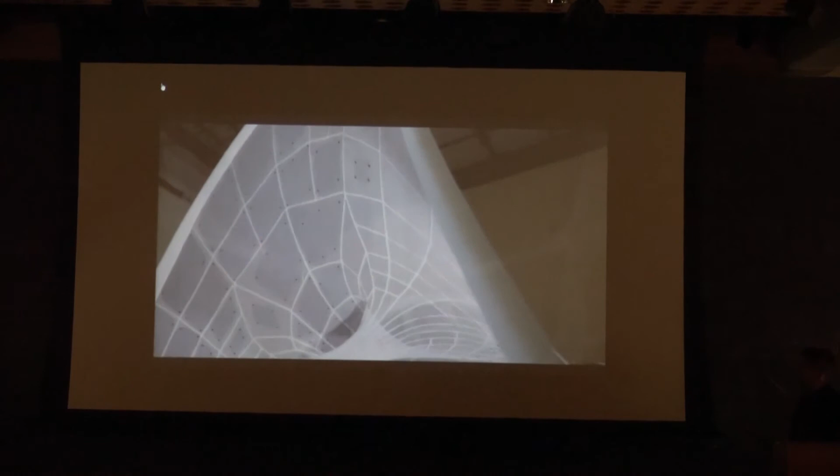To do it in such an efficient and beautiful way was something our innovation team always looks for, and it was great that even though we hadn't found it ourselves, we could support the innovation process that could enhance our products and hopefully enhance the world at large.

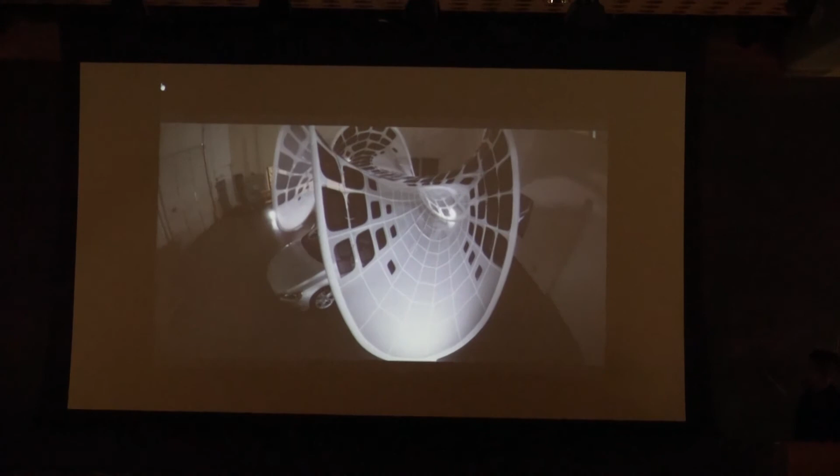The interrelationship of our structure and the car is something that drew attention to the car and also allowed you to experience the car in a new way.

What's really surprised me in this journey of producing this pavilion and winning this competition has been just how forward-thinking Volvo has been in terms of engaging us as designers, giving us the freedom to do what we're interested in, and really pushing the limits of what our fabricators are able to do. They've been very supportive and engaged with us in the entire design process, producing something we think is really an amazing concept that we hope can be applied towards future products and future opportunities.

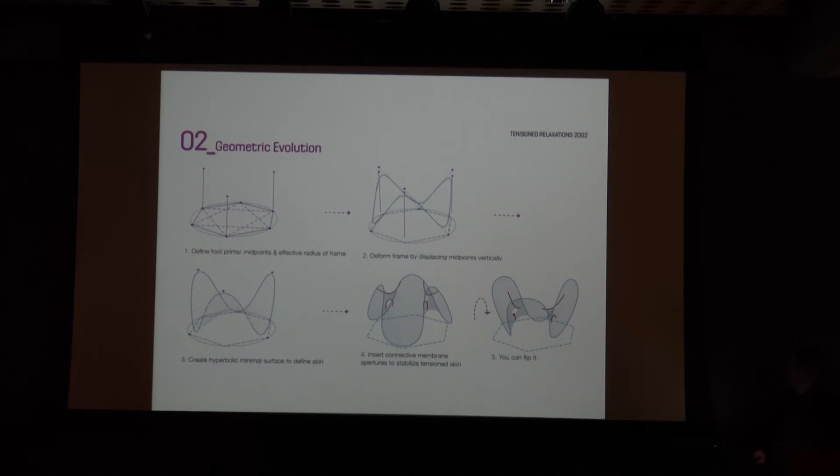The geometry is basically based off a 3-point system. There are 3 modes to the car, so part of identifying this as relevant towards Volvo was that it referenced the 3 modes of the car: pure electric, hybrid, and pure gas. So we have this 3-point surface, three entry points, 3 legs on the ground, 3 legs up in the air. We went through a series of tests to test different patterns and physical prototypes versus structural analysis by Buro Happold.

Buro Happold's work—this part's actually really important. Going back to the geometric and fabrication issue, when we first did the bid for this, it was way outside our budget to do the CNC bending for the perimeter frame.

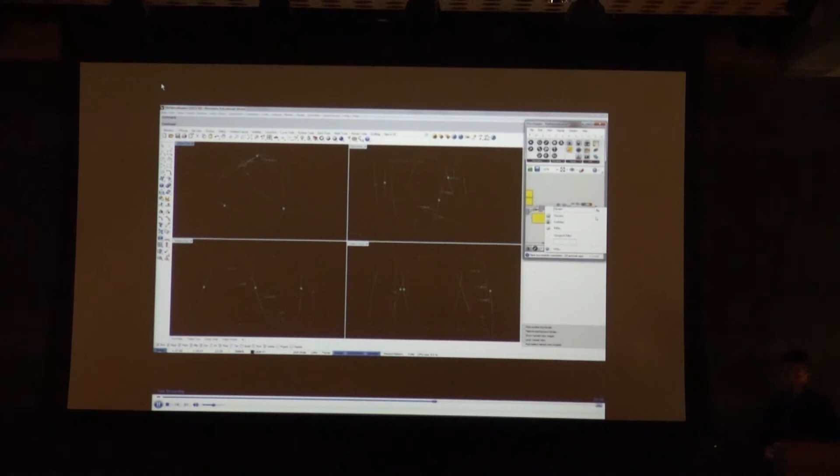I'd never done CNC bending before, so I was curious why it cost so much. It turns out the way CNC bending works is they charge you per radius, and our freeform geometry had like thousands of radii. I said, if I can turn that into 5 radii, what will it be? It was a lot cheaper, so we turned it into 5, remeshed everything, and got it within budget.

Structural analysis was done by Buro Happold. We were using Kangaroo, which is free—a plug-in for Grasshopper, which is free—a plug-in for Rhino, which we have a cracked version of, so it's free. They are using a software program called NDN Membrane, which is $40,000 a license.

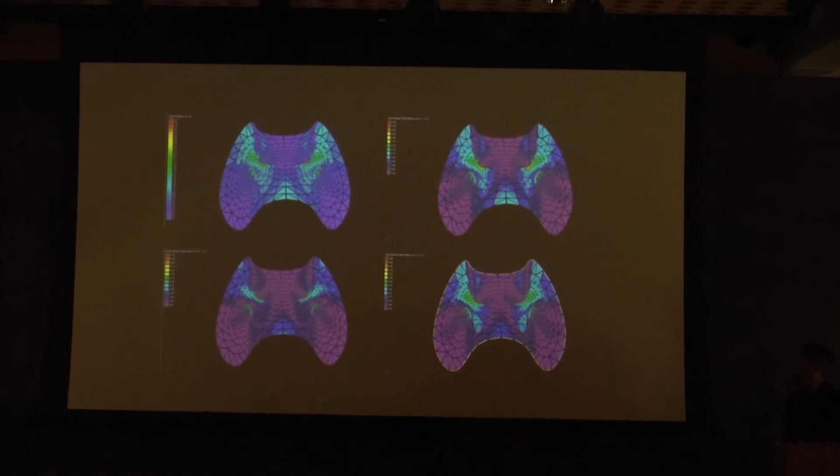Our structural analysis, our form finding versus their form finding, had a 2% differential. Pretty good for something that's free, but I wouldn't bet my life on that 2%. It's pretty critical that the engineers are involved and able to sign off on that. But I think it's pretty cool that you can use something entirely free and, through a purely intuitive process—not trying to engineer it, just trying to understand how it works and how to design with it—get within 2% of an engineered result.

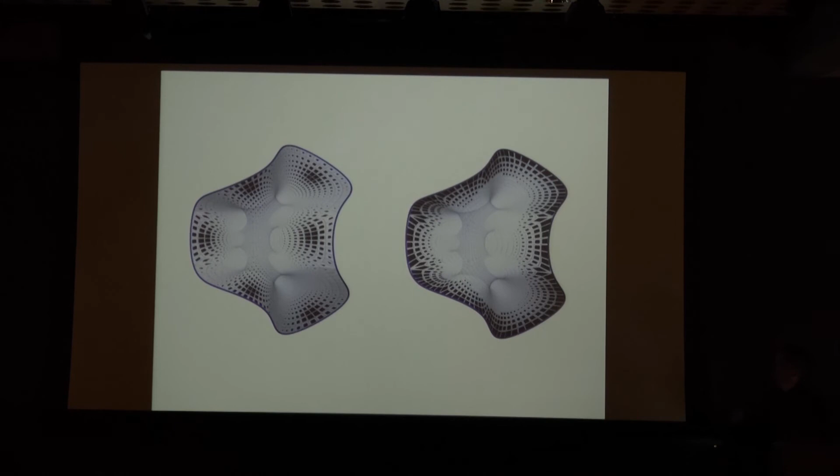At the time of the competition, we had this kind of gradient pattern of flexible photovoltaics, which was purely an aesthetic whim. We were just interested in expressing the gradient.

After we won the competition, we knew it was going to be touring Italy, but we didn't know where it was going, what time of year, or what orientation. So we analyzed the pavilion for 365 days of the year, 8 hours a day, for 360 degrees of rotation, to find the areas of greatest solar incidence, and created a heat map.

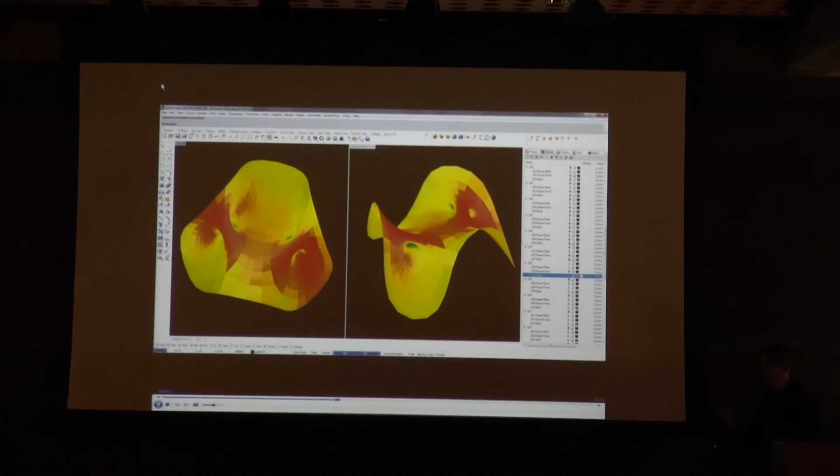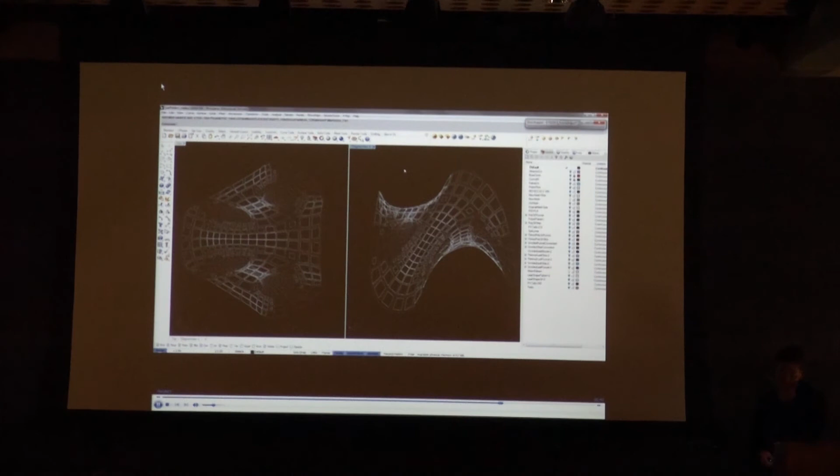That heat map gets remapped through a Grasshopper definition, which creates a stylized graphic pattern. Based on the cells driven there, we begin to map where the photovoltaics go. The whole thing gets unrolled into 2D space, put together as developable strips, then manufactured and stitched together.

The last thing is that photovoltaics have a weird property—they're only as strong as their weakest link, which means at 6 o'clock in the morning, the weakest link is everything other than those pink cells.

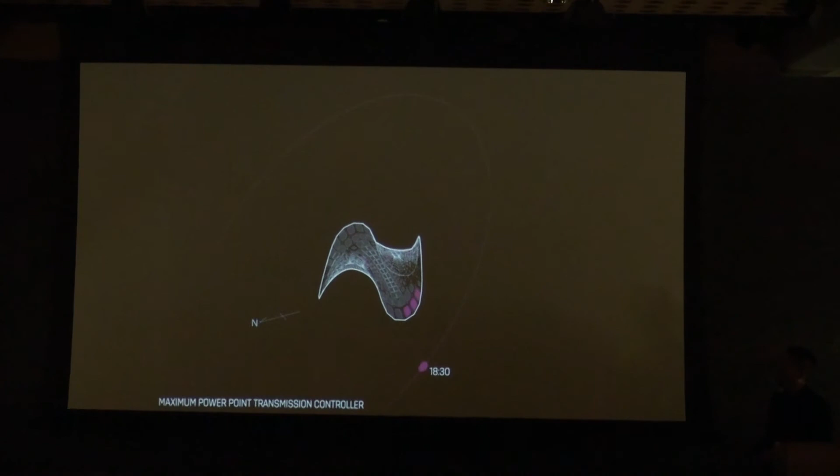So what we were able to do with the help of our solar consultants was implement an MPPT, Maximum Power Point Transmission Controller, which basically does real-time sensing of the solar array. As it senses, it disables anything that doesn't fall within a certain threshold. So the pink ones are the only ones operating at all times, meaning you're always able to get the maximum charge to the pavilion.

The whole thing flat packs in about 1 hour to assemble, and charges the car in 8 to 12 hours depending on the amount of sun available. Obviously you'll never have 12 hours of sun unless you're in Norway. So we see it as something you could leave out to charge, leave the battery there, then come back and collect it.

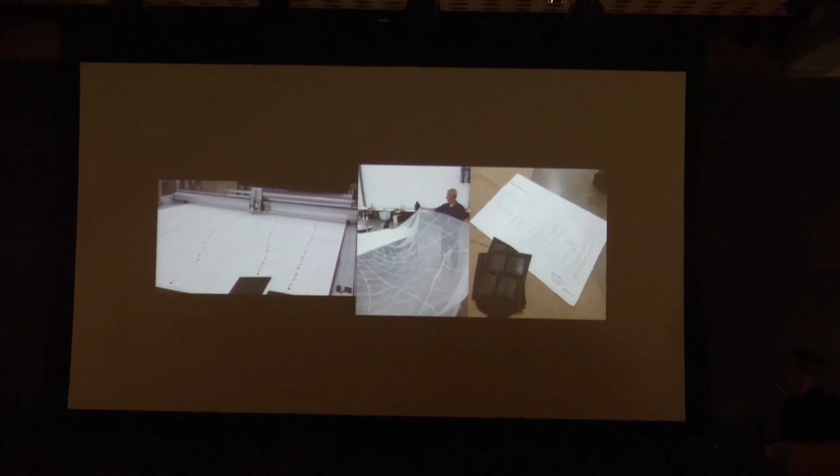It's all cut here on a Zund cutter, which is a 2D cutter, then stitched together. You can see here the pattern. There's also CNC pipe bending. All of this fits inside a B case, which is a 60 by 15 by 15 inch box — I like to call it a coffin for a small midget.

This was our first time putting it together. It took 3 of us, who had never done it before, 45 minutes. Sadly, now that we've had lots and lots of time to do it, we still do it in 45 minutes. I don't know why.

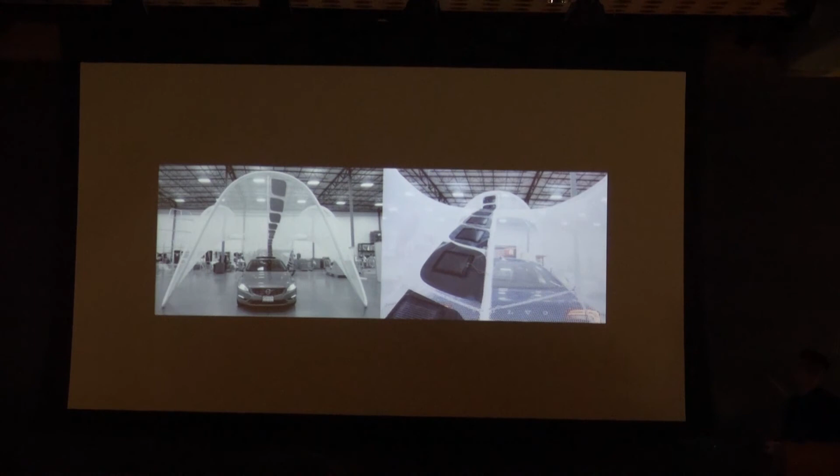The entire thing has won a number of awards and traveled the world. We weren't able at the time to meet our deadline and solve this detail, which is the seams. The wiring was supposed to go inside the seams, and the panels were supposed to be the same shape as the leaves.

We're now working with our fabricators, and we've developed a process that gets the panels the exact same size as the leaf, with all the wiring embedded in the seams. So we're now working on producing this as a limited edition production item, only available in China, because only people in China are willing to pay for it.

This is the pavilion. I'm going to end with 2 slides. This is a quote from Mark Weiser, the godfather of ubiquitous computing. The first talk I ever gave was at a conference called Digital Architecture, and I like to end with this quote because this image is of what was then known as the horseless carriage. Fast forward 100-something years, and we call it a car, and nobody cares that there was a horse.

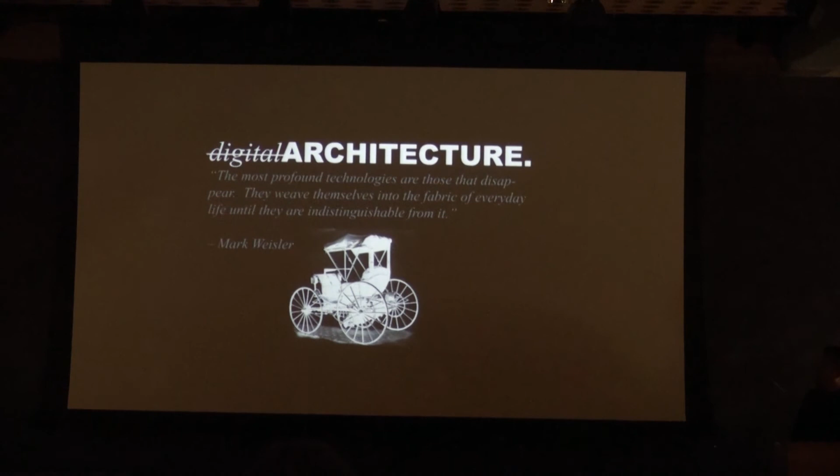Right now a lot of people have been talking, for the past 20 years, about digital architecture. I don't think it's digital architecture — I think it's still architecture. This is a quote from Mark Weiser, who really inspires me, and this is the way I like to think about it. In the end, what I'm into is really making things, the pleasure of making things and of physical artifacts, and knowing that good design can change the world. Thank you.